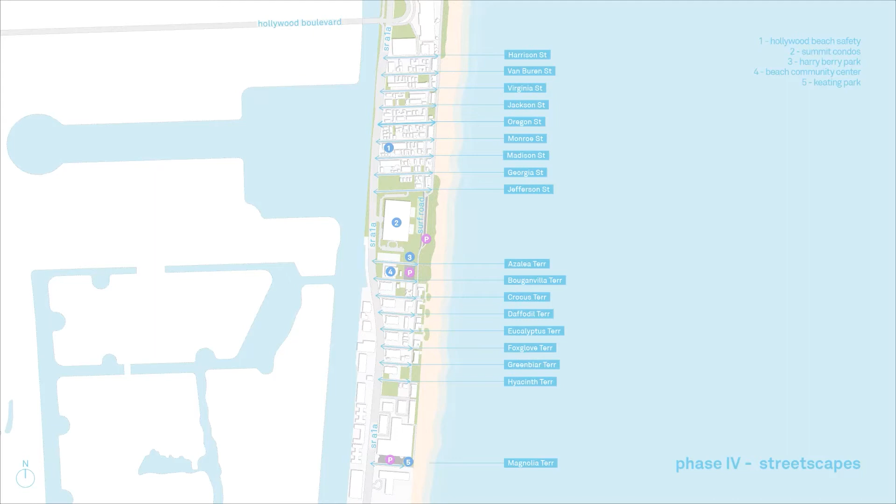In this video, we will be highlighting the upcoming changes occurring on this street during the Phase 4 Undergrounding of Overhead Utilities and Streetscape Beautification project.

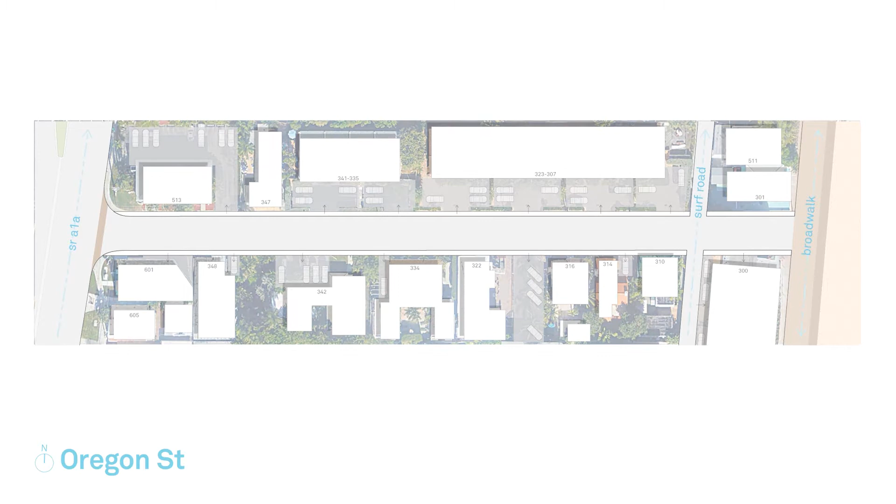These images illustrate the existing conditions both at the street and the street end. The information provided is based on conceptual designs and is subject to minor revisions during the engineering, regulatory, and construction design phase.

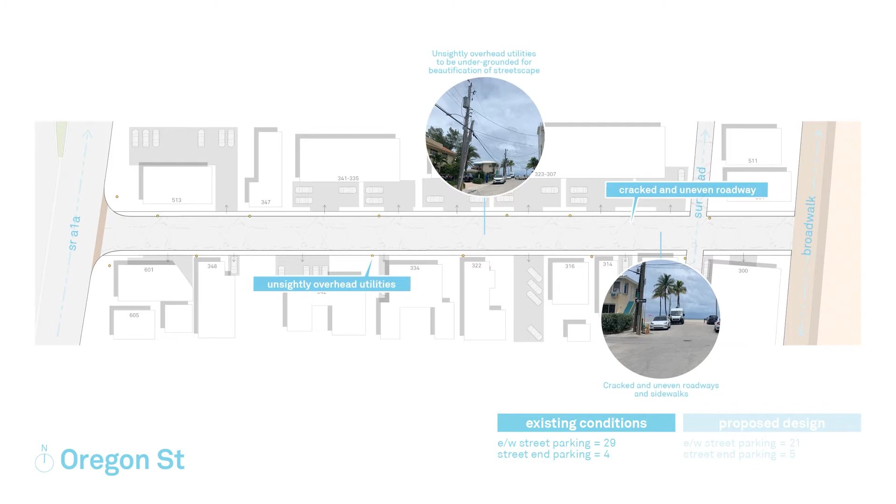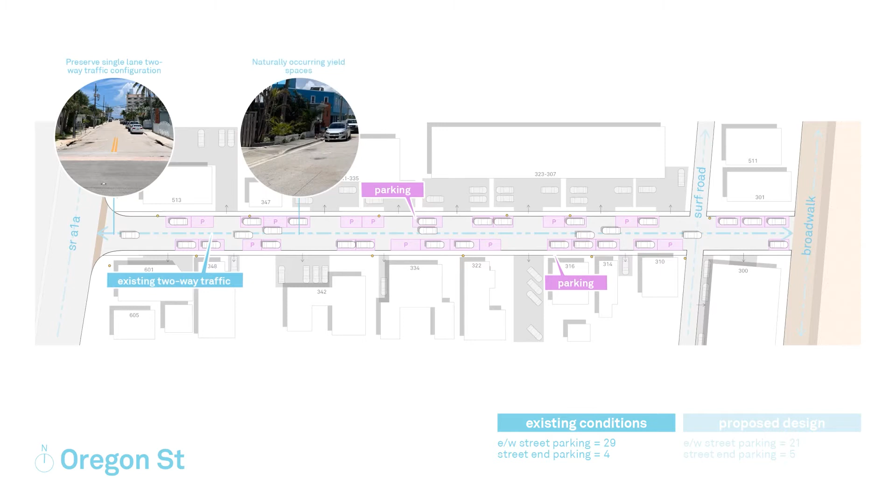Currently on the street, there are unsightly overhead utilities along with damaged patches of asphalt on the roadways and sidewalks. The existing streets are two-way traffic with parking on both sides of the street. Due to the nature of implementing the undergrounding of overhead utilities and streetscape beautification, the parking spaces, regulatory agency oversight, public lighting, and landscape improvements will be markedly different than the current conditions as seen today.

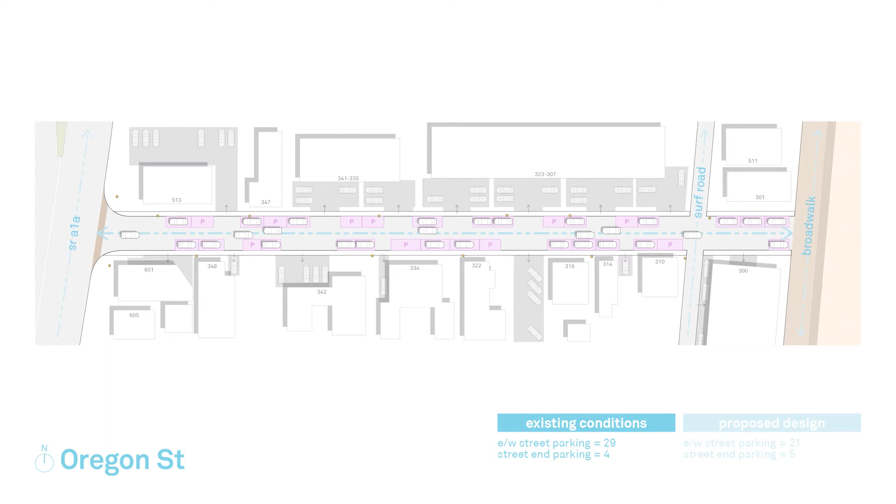Each street is a custom design based on existing conditions. The proposed design will incorporate newly constructed sidewalks and roadways with brand new paving that will extend onto the street. The photos shown depict images of the completed streetscape from previous phases 1 through phase 3, and are an example of the same types of lighting, hardscape, landscape, and streetscape improvements that will be implemented on this street.

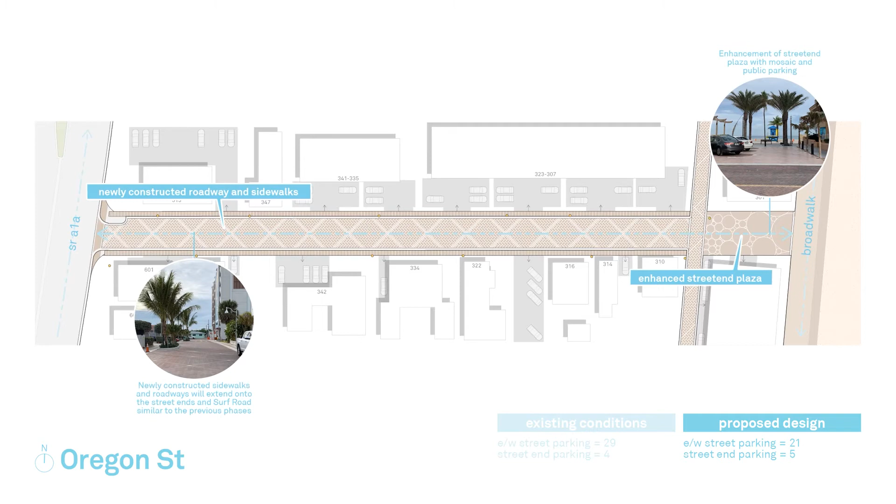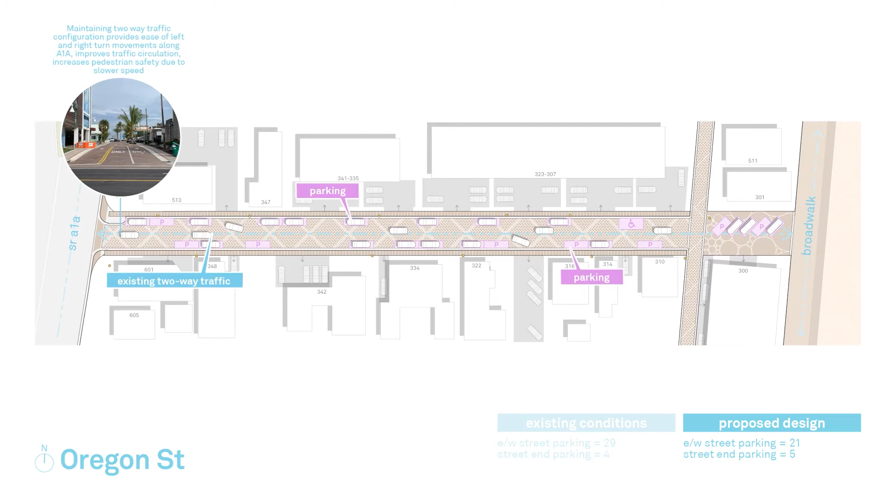In entire phase 4, as requested by the community, the current traffic pattern is being maintained, i.e., the two-way traffic with a single lane in each direction and parking on both sides of the street. Existing driveways will act as natural yield spaces, an area where a car can pull into to allow another vehicle to pass by.

Encroachments into the row have been addressed by the city passing an ordinance reducing the amount of space required on a private property for parking, i.e., if there is 16 feet 0 inches in a perpendicular configuration and/or 8 feet 6 inches for a parallel parking space, then these spaces will continue to function as parking on private property. In addition, if private property owners have wheel stops or small garden walls which can be reconfigured to allow for additional private parking, CRA staff will meet with those private property owners.

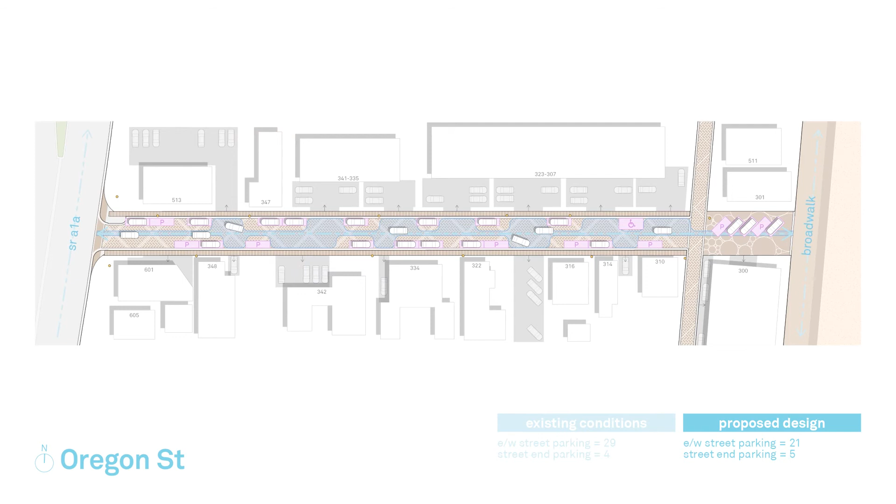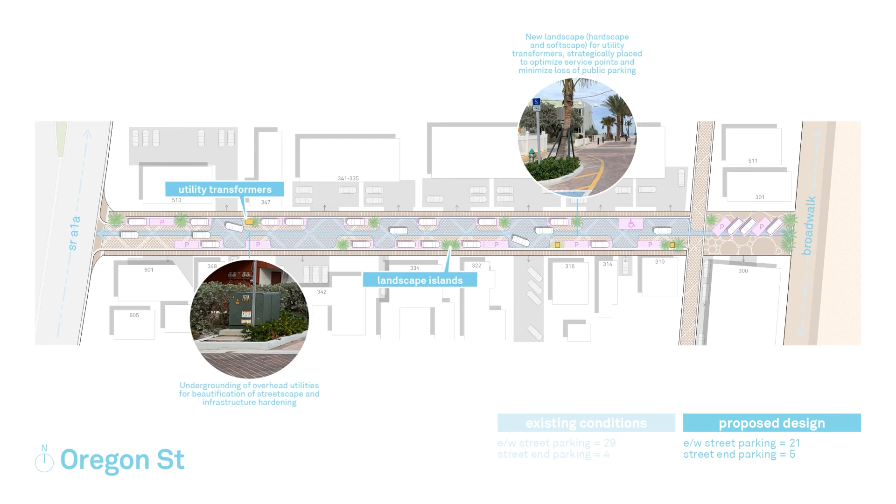The undergrounding of overhead utilities will result in utility transformers that will be placed in strategically located landscape islands to optimize service points to adjacent properties and minimize the loss of public parking spaces. Street lighting will also be upgraded to LED marine turtle-friendly lights, as seen in the previously completed streetscape projects from Tyler Street to Thomas Street and Iris and Jasmine Terraces.

The design of each street maximizes retaining as many public parking spaces as possible, while dedicating the areas needed for transformers as part of the undergrounding of overhead utilities. For Oregon Street specifically, Broward County regulations and FPL equipment needs result in a net loss of 7 public parking spaces, i.e., 8 parking spaces on the east-west streets, and a gain of 1 parking space at the street end.